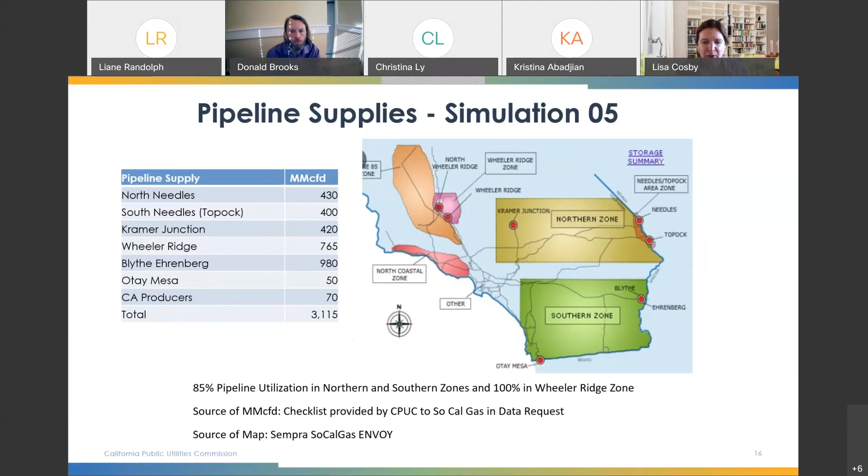And then we have the Wheeler Ridge zone in the north, the west, and then the California producers in the north coastal zone. We used 85% pipeline utilization in the northern and southern zones and 100% in the Wheeler Ridge zone.

And moving on to slide 17, this is another map of the zones and the receipt points, and this also shows the Los Angeles basin where the circle is, and this is just showing how the gas flows toward the Los Angeles basin where most of the customer demand is, and you'll see that most of the storage fields are near the Los Angeles basin or in it as well.

And so slide 18 shows the demand that we used in the base case for core customers, which are the residential and small commercial customers. We used the demand of 3,034 million cubic feet a day, and this was based on the SoCalGas forecast. You can see here the non-electric generation, non-core, of 664.6 MMCFD. This was also the SoCalGas forecast.

And then finally, the electric generation forecast. This is the natural gas for the power plants that use natural gas to produce electricity. So this was the forecast based on CPUC production cost modeling that was gone over in depth in the July 28th workshop as well.

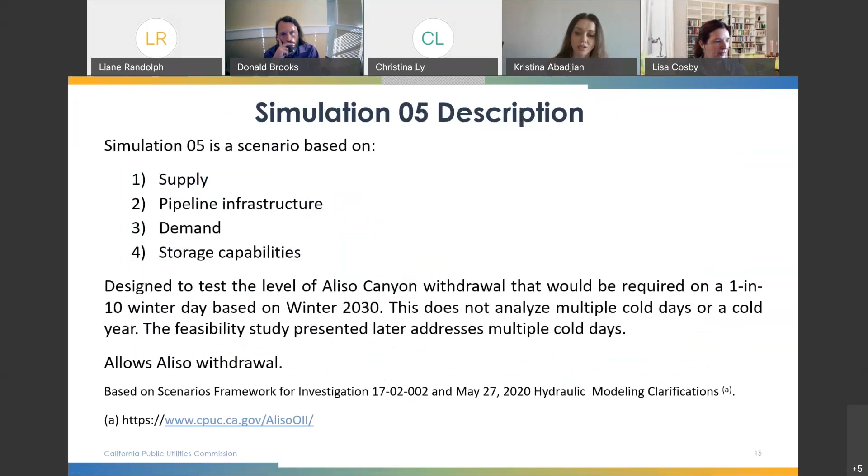Thank you, Lisa. We do have one question from Norman Peterson. Norman's asking about slide 14 and why it doesn't show the Simulation 5 that was presented on July 28th, which assumed Aliso withdrawal at 1265. So slide 14, the 1265 Aliso Canyon withdrawal rate would have been the maximum possible given the 90% Aliso Canyon inventory level as a starting point, but the results of the simulation showed a 520 withdrawal rate.

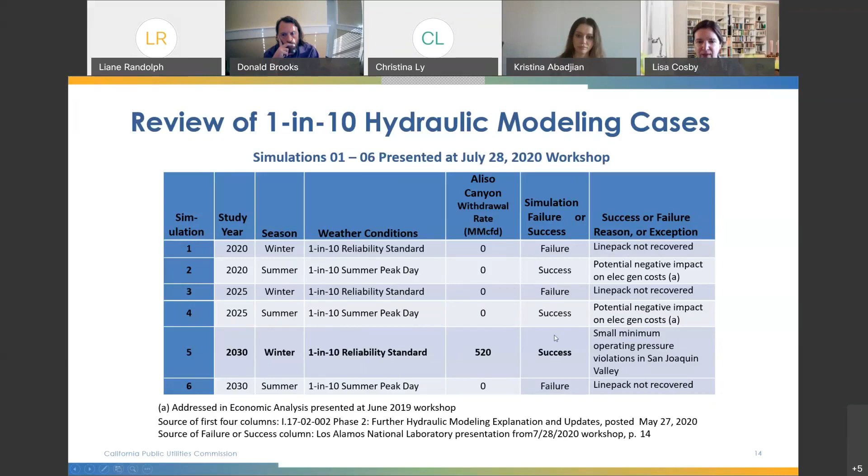So I think I have another slide where I have those lined up next to each other. Slide 19. This is showing the maximum withdrawal rates in the middle column, and then the far right column is the results of the simulation.

Thank you. We have another question from Edward Bedners, who's raised his hand. Mr. Bedners, you're unmuted. Hi, I actually put it in the chat. Looking at the average 67% on slide 22 for non-Aliso, just curious, what is the actual range that y'all had over those years? Do you know? I don't have that handy right now. You're wondering what the range was by year? Right, from 2017 to 2020. I just wondered if there was a wide range and that average was in the middle, or if it fluctuated slightly around that average.

Oh, yes, I don't have that readily available, but that is something that I think I could provide later. Okay. Just my thought is that using the lowest of the three might have been a more conservative approach, but if it's a tight range, that wouldn't matter. Thanks. Thank you.

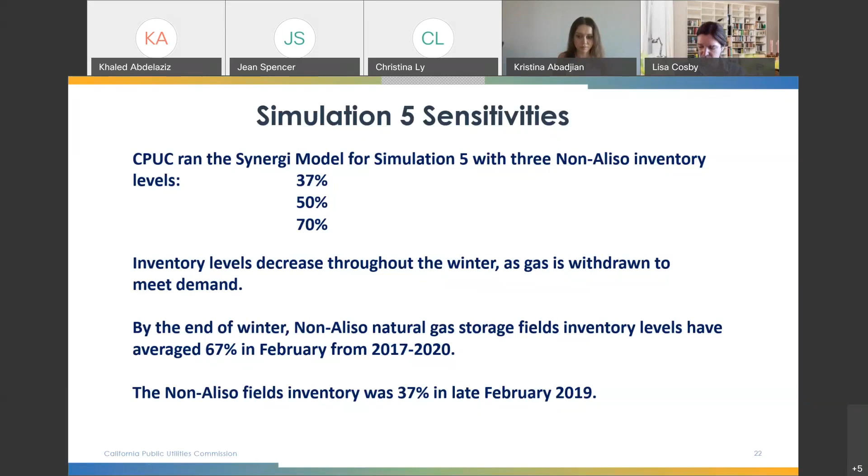I have a question about what you're showing in your slides today about simulation 5 in comparison to what LANL presented on July 28th. LANL slide 12 on 7/28 showed a maximum withdrawal rate of 1,265 MMCFD at Aliso Canyon. And then when the LANL presenter got to slide 14 for simulation 5, in the box for the line labeled pressures above minimum operating pressure, there was a no indicating SO5 failed. And again, that was with 1,265 MMCFD of withdrawal at Aliso Canyon.

And now today, you're saying that there wouldn't be a failure with the withdrawal down to 520 MMCFD. And we have on the side in a little box something about minimum pressure problems in the South San Joaquin Valley, which was quite a mystery at the July 28th workshop, and the way we left it was that would be looked into by SoCalGas. So could you help me walk from what LANL was presenting on July 28, which very clearly assumed 1,265 MMCFD withdrawal capacity at Aliso Canyon, to simulation 5 that shows success in bold for Aliso Canyon at 520 MMCFD withdrawal?

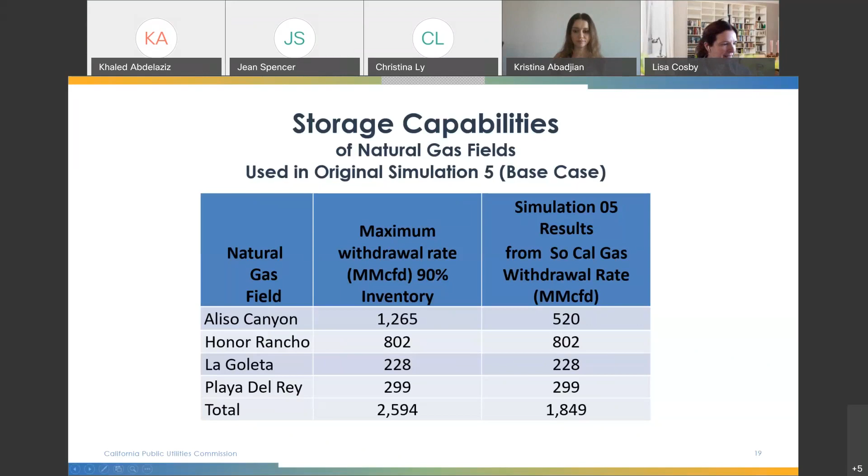So slide 24 is a preview of the results of the sensitivities, and I will be presenting detail in the following slides. But just to give you a sense of the results, sensitivity 1, using a non-Aliso inventory of 70%, the Aliso Canyon maximum withdrawal rate was 830 million cubic feet a day, and this was associated with an Aliso Canyon inventory of 13 BCF.

Sensitivity 2, with a non-Aliso inventory at 50%, this would be for Playa del Rey, La Goleta, and Honor Rancho, the Aliso Canyon withdrawal rate would be 1,010 MMCFD, and this would be associated with an inventory of 20 BCF.

And finally, for the third sensitivity with the lowest non-Aliso inventory of 37%, the Aliso Canyon withdrawal rate would be 1,160 MMCFD, and this would be associated with an Aliso Canyon inventory of 27 BCF. And just as a point of reference, the current authorized maximum inventory level at Aliso Canyon is 34 BCF.

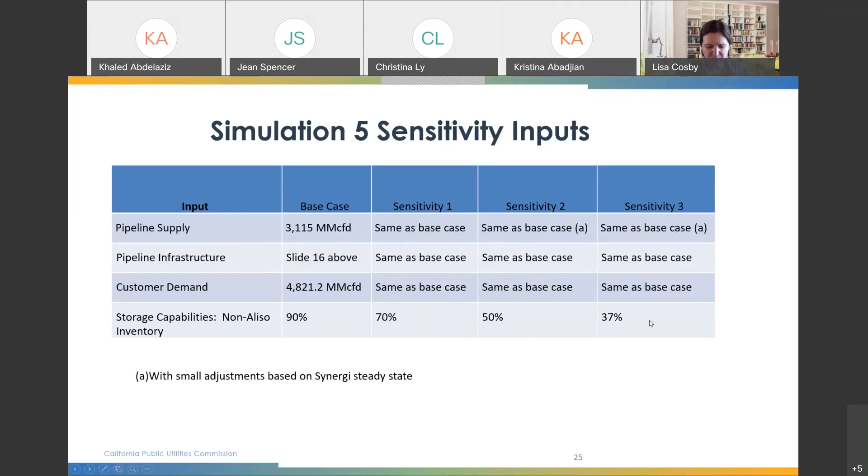Slide 26 lays out the criteria for a simulation success. So a success would mean that the combination of inputs would produce a workable result. And these were also outlined in our July 28th presentations, and they're also in the scenarios framework that's in the CPUC website in our source note below. So first, the criteria is the pressures remained above the minimum operating pressures. The second, the customer demand was met and regulators operated within rated capacities. Third, the pressures remained below the maximum operating pressures.

4, the line pack was recovered. And as you can see in note A, the line pack is the gas present in the pipelines throughout the pipeline system. There are over 100,000 miles of pipeline in the SoCalGas system. The line pack being restored means that the amount of gas present in the pipeline at the end of the simulation is approximately equal to the amount of gas at the beginning of the simulation, which guarantees that each operating day does not impose any constraints on future days. The simulation is a 24-hour period that represents a full gas day. And finally, the 5th criteria is that the storage fields maintain pressure.

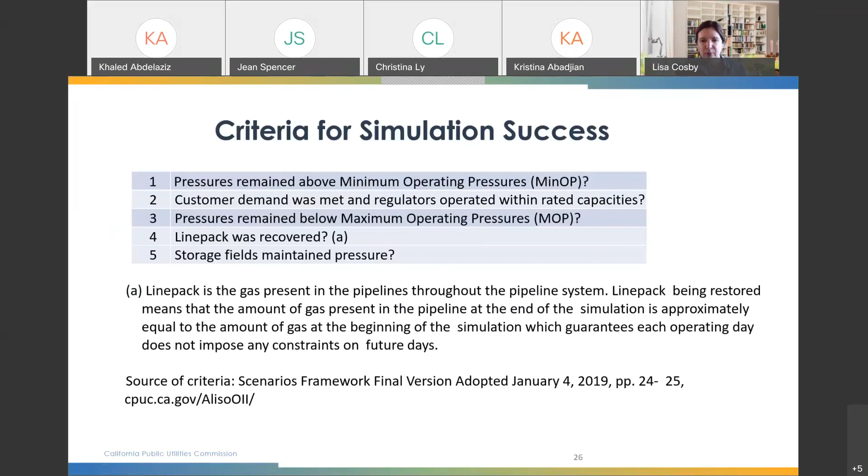So now we're on slide 27, and this is going to show us the results of the first sensitivity with the non-Aliso fields at 70% inventory. This slide shows the loads, the supplies, and the line pack. And the result was that 830 million cubic feet a day are needed from Aliso. I'm going to go over this graph in some detail because you'll see it again, and it's a little bit complicated. The x-axis shows 24 hours from 6 a.m. through 6 a.m. the next day, which is represented by hour 30. You'll see midnight is hour 24.

The y-axis has 3 axes. The innermost one is the loads or customer demands, and this is shown in the black dashed line. And these are in negative numbers. And you'll see that there's a peak in the morning at 7 a.m. And that's consistent with winter heating and cooking in the morning. The demand decreases during the day, and then in the early afternoon, it starts to increase again, and there's an evening peak at 1800 hours, or about 6 p.m. And about that time, the non-core load decreases.

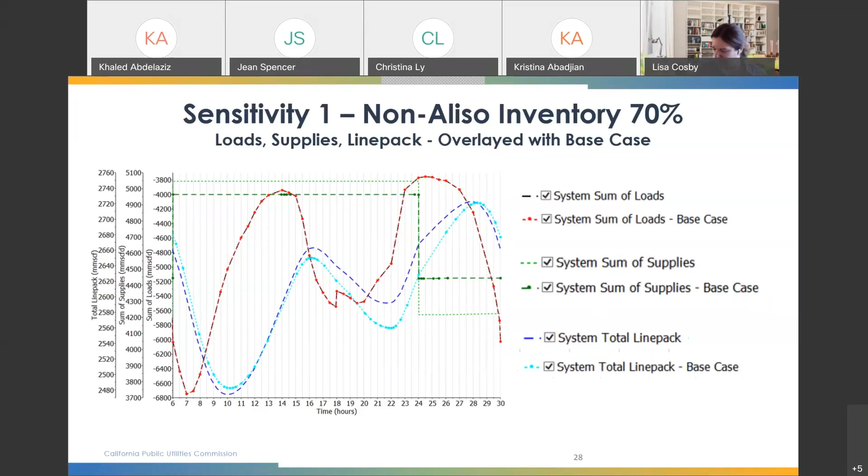Slide 30, this is showing us the summary of results of sensitivity 1. So criteria 1, did the pressures remain above the minimum operating? Yes, there were 9 exceptions in the San Joaquin Valley, all of which returned during the simulation, returned from their violations.

The demand was met. Item 2, the supply exceeded the demand. Item 3, did the pressures remain below their maximum operating pressures? Yes, there were 2 nodes that exceeded their maximum pressures by minor amounts, and 1 did not return from a minor violation. But this was not significant enough to stop the criteria from being met.

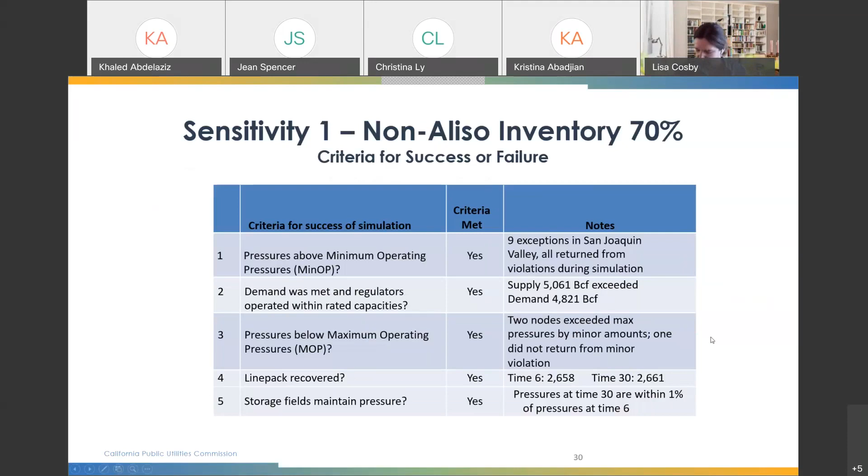So now we're moving on to slide 31, and I'm going to show similar slides as I just did for sensitivity 1. This is the result of sensitivity 2 with the non-Aliso inventory at 50%. So as we have less on hand in the Playa del Rey, La Goleta, and Honor Rancho fields, more is needed from Aliso, and the results showed that 1,010 MMCFD were needed from Aliso.

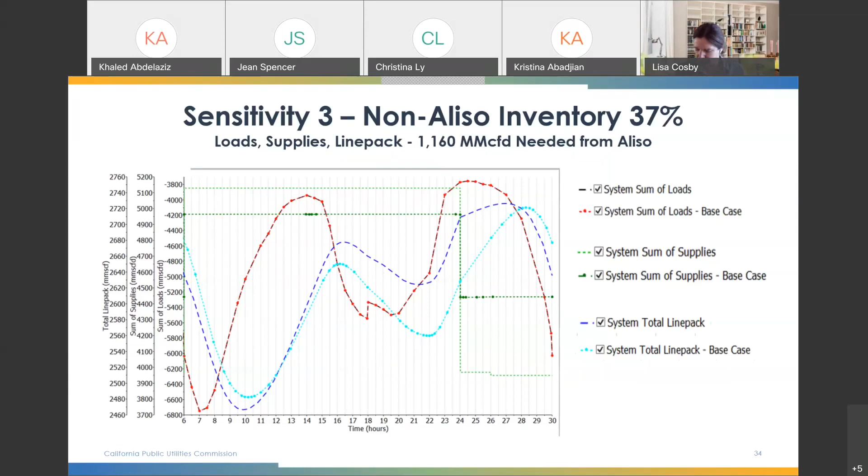Now we're on slide 35, showing the San Joaquin Valley pressures. Again, we have a similar result between hours 8 and 9 a.m., and the pressures do recover from their minimum operating pressure violations by the end of the simulation.

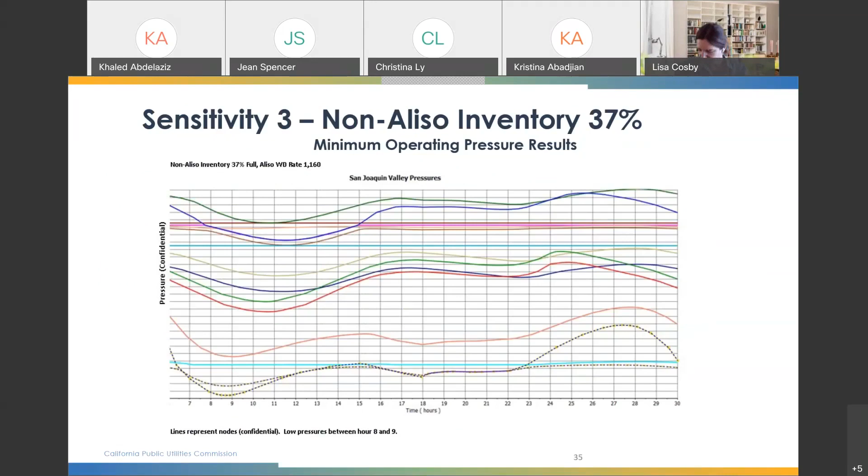Now we're on page 36, the summary of the results of the lowest non-Aliso inventory levels used in this simulation. So again, there were some minor violations of minimum operating pressures, but they did return from the violations. Item 2, the demand was met.

Item 3, there were 4 nodes that exceeded the maximum pressures by minor amounts, and 1 did not return from a minor violation, but this was not significant enough to keep this criteria from being met. Item 4, the line pack was recovered.

And item 5, the storage fields maintained their pressures. Now we're on slide 37, our conclusions. So the sensitivities on simulation 5 resulted in the following Aliso Canyon withdrawal rates and inventory levels.

Sensitivity 1 with the non-Aliso inventory of 70% showed an Aliso Canyon maximum withdrawal rate of 830 mmCFD and an Aliso Canyon inventory of 13 BCF.

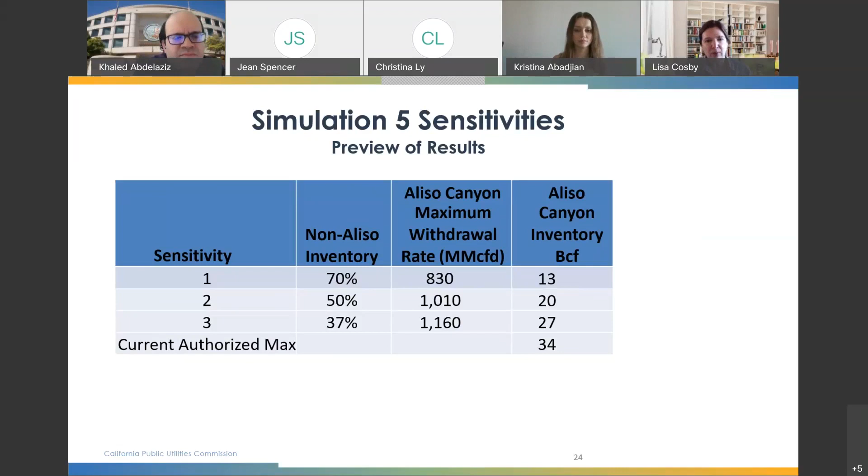This is also from the Synergi model. Let me go to a slide where... so when we run Synergi, one of the outputs is this chart, and it's a result of all the calculations that go on during the simulation.

As a result of the supplies and the demands, so that's not something we put in. It's an output of Synergi.

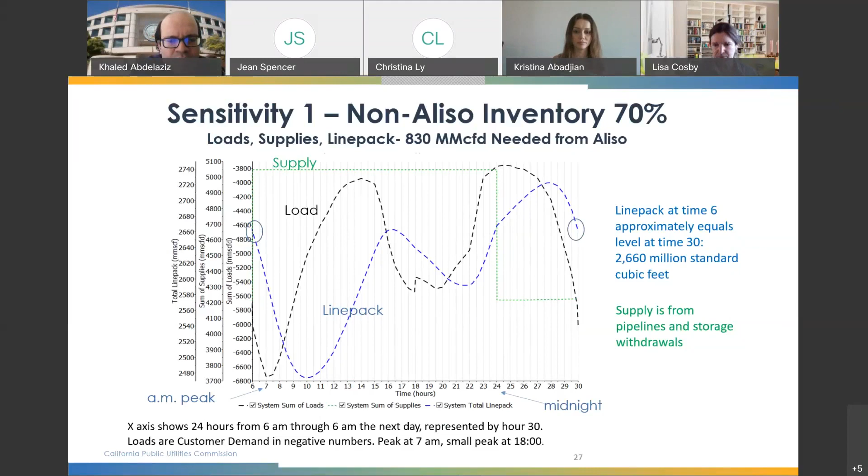It said actual recent inventories, and then the required inventory was 27, so I just want to be sure. So up at the table, sensitivity 3, that means that the actual recent inventories were 37%? The actual non-Aliso inventories were 37% as an average in February 2019. And so that's the average of... honor.

Sorry, go ahead. No, that's great. I shouldn't have interrupted, I'll let you finish.

Yes, the 37% was the average at Honor Rancho, Playa del Rey, and La Goleta in February 2019 on a couple of days that month.

Okay, just wanted to be sure I had that right. Thank you. This is Jean.

I just wanted to add to that a little bit. One of the reasons we wanted to include those numbers is what we saw in that year was that Honor Rancho was depleted a lot more than the other storage wells. So we actually put in the real numbers from the different fields so that we could model how the distribution actually was in that year.

No, that was terrific. I'm really appreciative of that. I just wanted to make sure I understood that association. Thanks.

Thank you. Norman Peterson has a follow-up question to his original question, and it's how consistently is the line pack at 2660 mmCF?

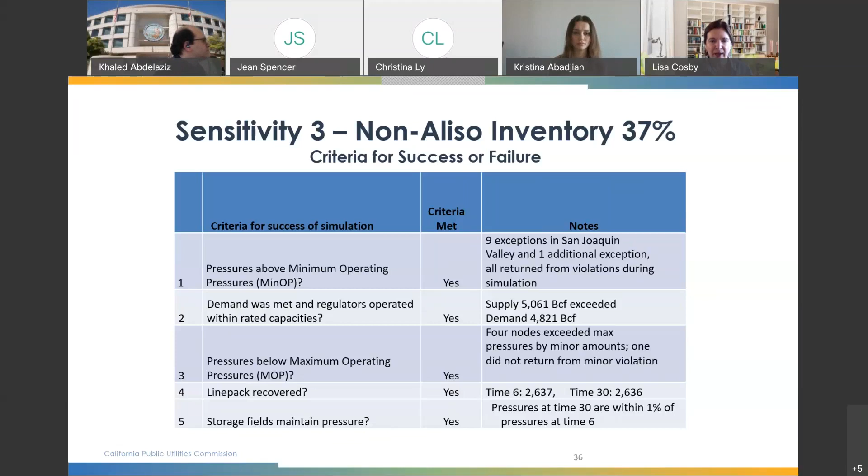I can go back up to the 50%. The 50% level line pack was 2647.

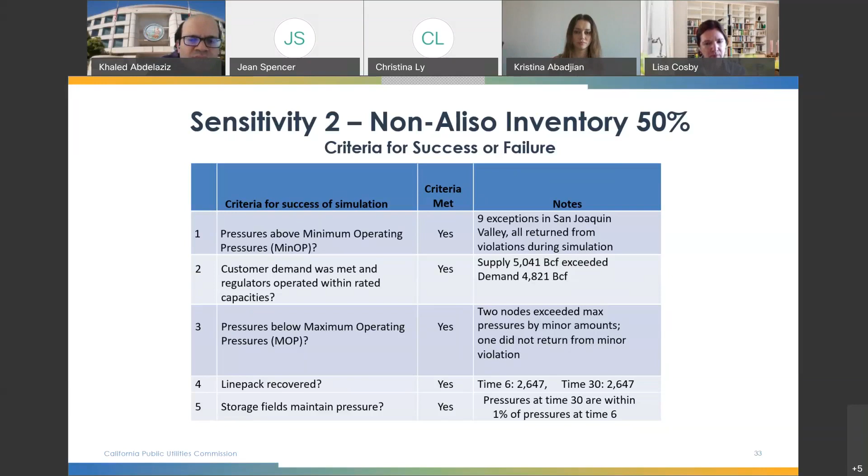Thank you. The next question is from Kathy Yap. Miss Yap, you're unmuted. Yes, I had a question about, I think it's slide 37, where you have the results for the sensitivities listed, the conclusions.

The Aliso Canyon inventory levels you list, do you know whether those are the minimum inventories that are required to produce that withdrawal rate? That's, for example, sensitivity 3, the 1160 number for the withdrawal rate. You need, is that a minimum or an average for the associated inventory?

I think you could consider that a minimum in that you would need to have at least that much in there to have the withdrawal rate of 1160. So you couldn't go below that 27 and still get a withdrawal rate of 1160.

Okay, thank you for clarifying.

Thank you. The next question is from Jason Egan, who asks, is Energy Division suggesting that there would need to be a requirement that SoCalGas maintain certain minimum Aliso inventories throughout the winter? Does this assume certain Aliso withdrawals in November through January, and that SoCalGas would need to have 27 BCF in Aliso for February?

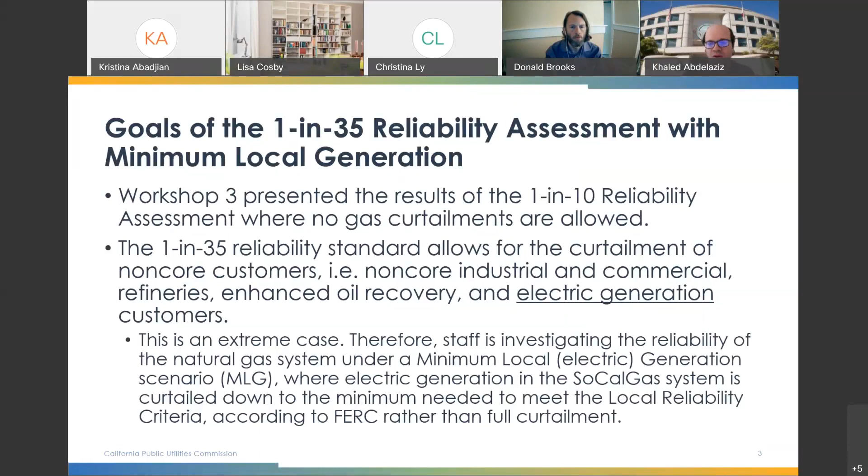So now I'm on slide 4. I'm going to discuss the summary of inputs and assumptions for the 1 in 35 with minimum local generation. So here I'm showing a breakdown of the demand that would be included in the model, or in the SynerGi model.

The first thing I'm going to note here is that the summer demand under a minimum local generation scenario is lower than that of the summer high demand we discussed in workshop 3. And we already showed in workshop 3 that for those summer cases, we didn't need Aliso. So we saw no reason to run the summer cases under minimum local generation scenarios.

However, for the winter, we know that the simulations in the 1 in 10 fail without Aliso. Now we have a much lesser demand for 1 in 35, so we're wondering how that would affect the need for Aliso or not. So we're looking now at 3 simulations, simulation 7, 8, and 9. They're all for the winter season, and for all 3 study years we have considered. Simulation 7, that's winter 2020. Simulation 8, that's winter 2025. Simulation 9, that's winter 2030.

And the second column here on slide 5 is what I term the minimum local generation. Again, this is Energy Division's output from production cost modeling, which in itself was based on power flow studies that were provided by balancing authorities, namely CAISO and LADWP. So those power flow studies served as an input in the PCM, and we only designated certain plants to be allowed to consume gas while curtailing all the other plants for one of the summer months, which I believe was September, and then one of the winter months, which was December. And the end result of this PCM simulation is what you're seeing here.

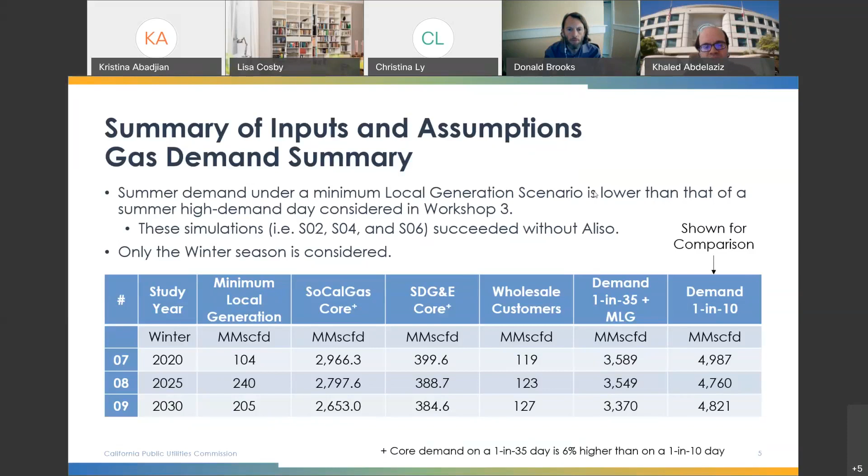showing the total fuel burned by all plants that were allowed to run under a minimum local generation scenario. So this is basically a sum of all power plants or all units coming from the production cost modeling under a minimum local generation scenario. On the x-axis, you're looking at the hour of the day, starting from hour ending 1 to hour ending 24. On the y-axis, this is the electric load, or how much gas demand we need actually, in million cubic feet per hour. And then inside the plot, you have three cases: in red, that's 2020, in green, that's 2025, and in blue, that's 2030.

And I've added the numbers here on the chart. That's the total use of the whole day. 240, that's the green, 2025. 205 MMCFD, that's the blue of 2030. And 104, that's winter of 2020.

So the only thing I would note here is that in 2020, you see the morning peak and you see the evening peak in the electric generation, or in the gas required by the electric generators. You don't see much of the curve here. If you go to 2025, which is the green curve, we have slightly more gas use for the minimum local generation to maintain reliability. And we also start to see the duck curve in winter. And then you move to blue, which is the winter 2030. You have slightly less gas use to maintain local reliability, but then the duck curve becomes more and more prominent.

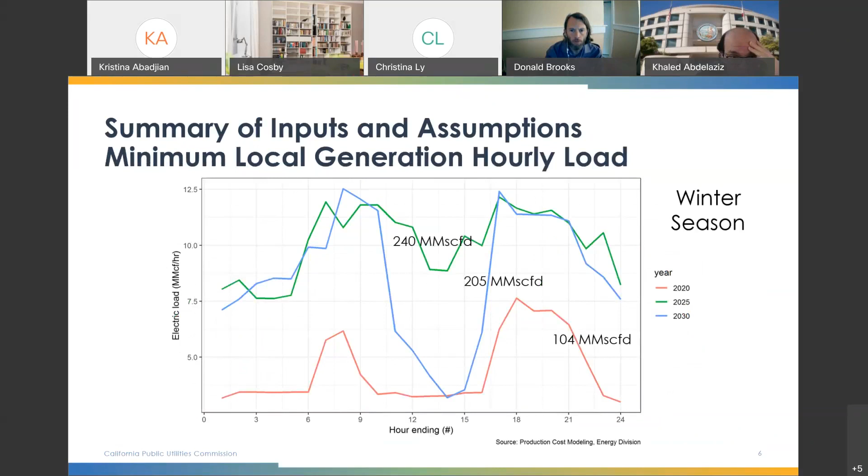So what I would note here is that although we see those duck curves for the minimum local generation, and we were afraid that those ramps are too much to be handled by the gas system, once you lump them or superimpose them to the core customers, you end up with this plot here. So you don't see much of the ramps of the EG, but the profile is heavily governed by the core customers' profiles, which is very, very similar to the 1 in 10 cases that we have shown this morning and in the last workshop.

So I'm using the same color codes here. In red, that's winter 2020. In green, that's winter 2025. And in blue, that's winter 2030. And again, this is showing the loads after we load everything inside SynerGi. And this is how the loads look.

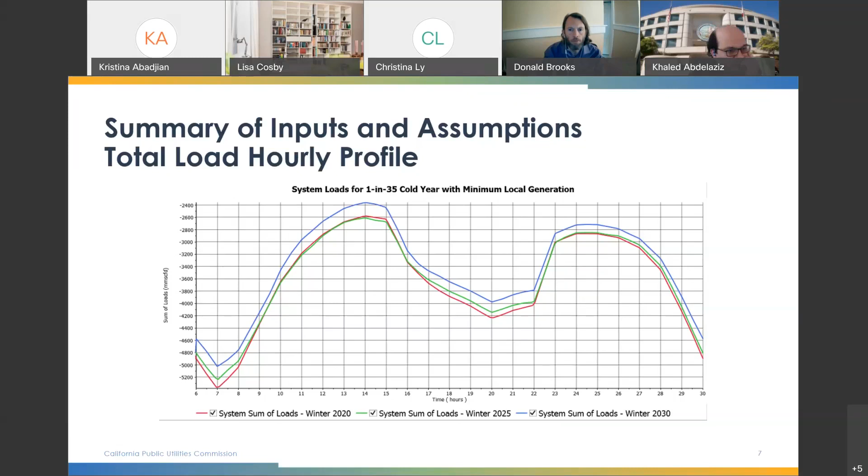So now that I've covered the loads, I'm going to start looking at the rest of the assumptions using the model. So I'm now on slide 8. That's the summary of inputs and assumptions for the supplies, storage fields, and the outages. And we're basically using the same set of assumptions used in the 1 in 10 in workshop 3 or in the base case in this morning's workshop. So we're assuming that the non-Aliso fields are maintained at 90% inventory levels. We are using the maximum withdrawal curves. We are still using reduced pressures on line 3000, line 4000, and line 235-2, which are on the northern system.

I've listed the supplies here, the southern zone, the northern zone, the Wheeler Ridge. The second column, we have the nominal capacity. We previously said that we're going to use receipt point utilization of 85% for the north and the south and 100% for Wheeler. So the column before last has the supplies without the outages. And then due to the outages I'm showing here, which are the reduced pressure on line 3000, line 4000, line 235-2, and adding a California production of 70, I end up with supplies of about 3.1 BCF. So these are basically the same supplies we've used in the 1 in 10 simulation.

We are also using 90% inventory levels in the non-Aliso fields. So we have the same withdrawal rates that we have seen before, which is 800 for Honor Rancho. I believe it's 299 for PDR and 230 for La Goleta. So I'm not going to go much into the details. I'm going to start showing the results now. So slide 9, that's the section break. Slide 10, I'm showing the results of those 3 simulations.

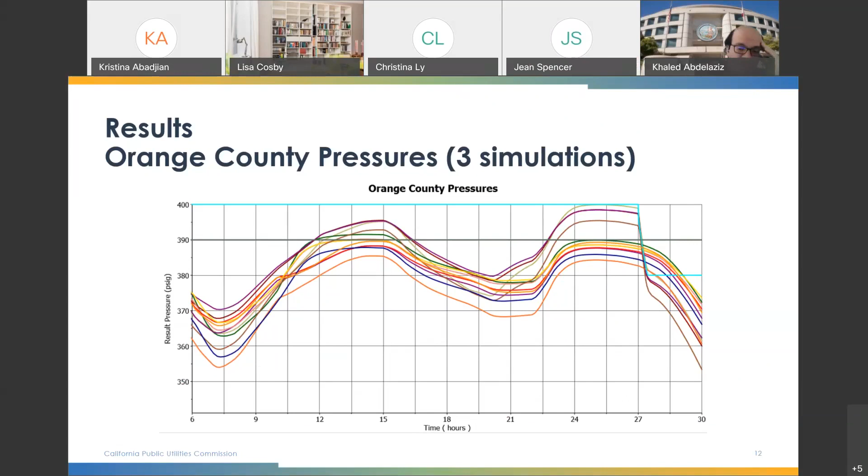Khaled, are you talking? I'm not hearing anything. Hi, testing. Hello, testing. I hear you, Christina, but I'm not hearing Khaled. Okay. Khaled, if you can hear us, we cannot hear you. Can you guys hear me now? Yes, we can hear you. Okay, great. Yeah, my phone got disconnected. I had to hang up and call back. So start video. Let's start sharing again. All right.

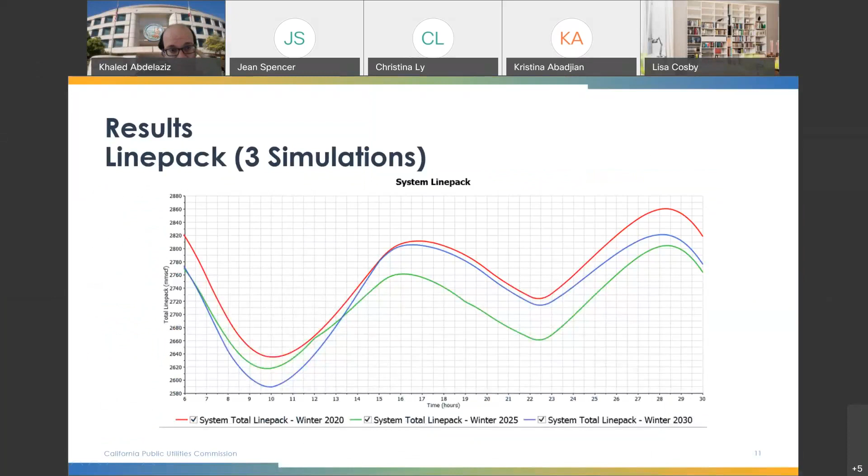So as I was trying to mention, all the simulations were successful, line pack was restored, all 4 criteria were maintained. So here is the summary of findings. The daily demand on the 1 in 35 extreme peak day with a minimum local generation is about 70 to 75% of the daily demand on a 1 in 10 peak day. The 1 in 35 extreme peak with MLG, or minimum local generation, simulations for winter 2020, 2025, and 2030 were successful without the use of Aliso Canyon UGS.

It follows also that the 1 in 35 extreme peak with all non-core curtailment simulations will also be successful without the use of Aliso. And sensitivity on the inventory level of non-Aliso fields could be performed if needed. And that's all I have for the 1 in 35. And now I think we can take questions.

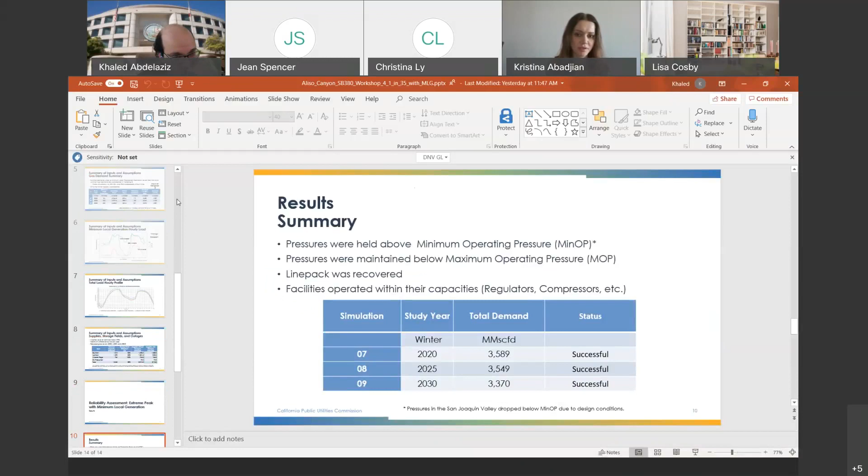Thank you. We just have one clarifying question from Norman Peterson, who asks if the min local gen figures came from the joint agencies, specifically the CPUC, CEC, LADWP, and CAISO. If not, what was the source? Yes, the power flow studies were supplied by LADWP and CAISO. We took those as an input for our own production cost modeling in SERV-M, and then the result of that was the fuel burn profiles for different units. And from them, we were able to generate the hourly profiles for the gas use and the total demand that I'm showing here. To clarify, it's LADWP and CAISO, but not the joint agencies, because the joint agencies would include the California Energy Commission.

Thank you. Our next question is from Marcel Hawicker. Question is, how did non-core curtailments compare to historical curtailments? And what was the amount of non-core gas that was curtailed? I honestly don't have any idea about the magnitude of the curtailments historically. Maybe the gas policy and reliability team has any input. So just for comparison, the EG generation for the 1 in 10 is almost a BCF. What we model in the 1 in 10 for EG is around 1 BCF in the winter. So here you're actually looking at 10%, 25% and 20% compared to the 1 in 10 simulation that we showed this morning.

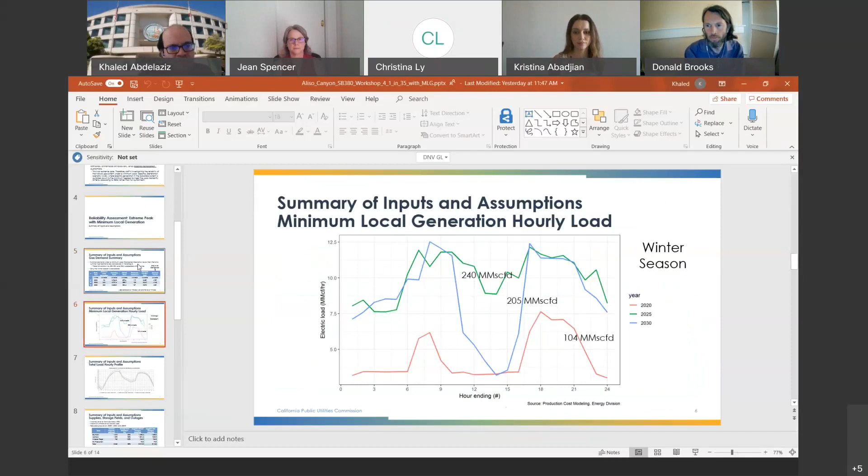Thank you. We have another question from Jason Egan, who asks, to make sure I'm tracking, you used 1250 MMCFD of receipt capacity on the northern system, which is 100% of the current receipt capacity there. Is that correct? Let me bring up the slide, Christina. So the supplies with the outages are the 1250. So these are under certain reduction of pressures on line 4000, line 235, and line 3000. And just a reminder that this is for the year 2030, not for the current year. Jason's follow-up question is, and for all of these scenarios, we are assuming all non-core customers are curtailed except minimum generation. Yes.

Jason asked another follow-up. In our last workshop, MinGen showed pretty significant increased costs and unserved load. Was that a consideration here? I'm showing the results for the hydraulic modeling only. So we're trying to know the effect of only maintaining minimum local generation on the storage fields, on the gas system. I believe Donald and Munir addressed the reliability issues back in workshop 3. Donald, do you want to add anything? No, you said it right. We addressed the electric reliability effects before. It's the hydraulic modeling reliability effects that we're talking about now.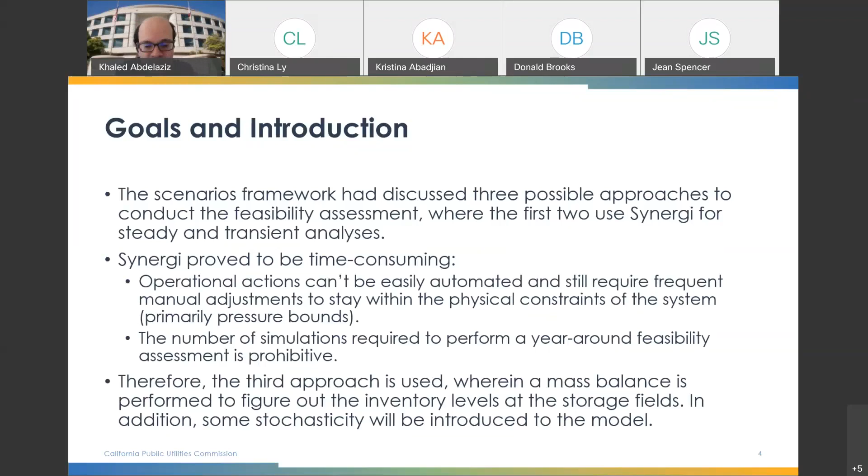So I'm moving to the next slide, slide 5. I'm finding 2 ways to present the methodology. On this slide, I'm just presenting the summary of how I executed the feasibility assessment. In 4 or 5 slides after that, I'm presenting it in depth. You might not be interested in the exact parts, but I'm hoping that this summary will provide the outlines or main steps to perform the study that we used.

So the summary on slide 5: the first bullet, the methodology attempts a mass balance on each day of the study year. The methodology inputs are the forecasted daily demand using random draws from a known distribution, and an assumed pipeline capacity, for which I'm going to assume that the customers are scheduling this full capacity every day.

Also, one very important input to the methodology is the maximum withdrawal injection curves that are obtained from SoCal and are primarily experimental results from their fields. Another input is the working gas capacity of all 4 storage fields.

So using those inputs, I do a simulation for a whole year, and for each day I determine whether there is an excess or deficit in the gas supply. Based on that, I either inject or withdraw from the storage fields, and I do that while respecting the injection and withdrawal limits of each of the 4 fields.

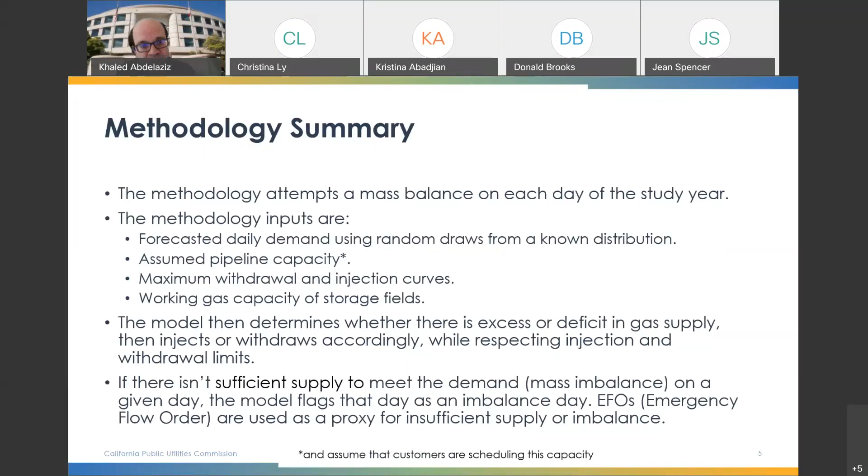So this is the summary of what is in depth for the methodology. The following steps: step 1, I started looking at the historical data for the send-out. We already had a data request from SoCal, I believe it was data request 6, and we have historical send-out data between 2010 and 2017.

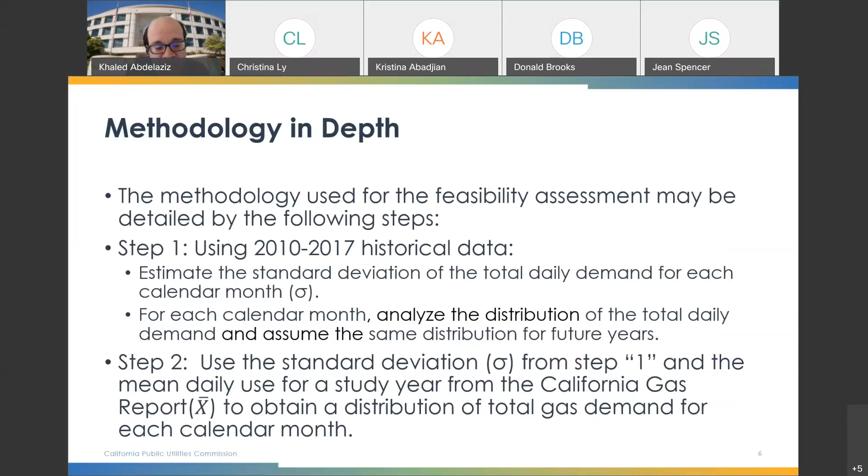So now I'm moving to slide 7. Step 3: for each calendar month, randomly select a number of daily demand values from the assumed distribution. Ideally, from a statistical point of view, I need to make many draws, but since I want to track the inventory levels, I have to make a number of draws equal to the number of days in that calendar month, be it 30 days, 31 days, or 29 days.

And once I do this draw, or I select a number, now I have what I term the forecast daily demand on that day.

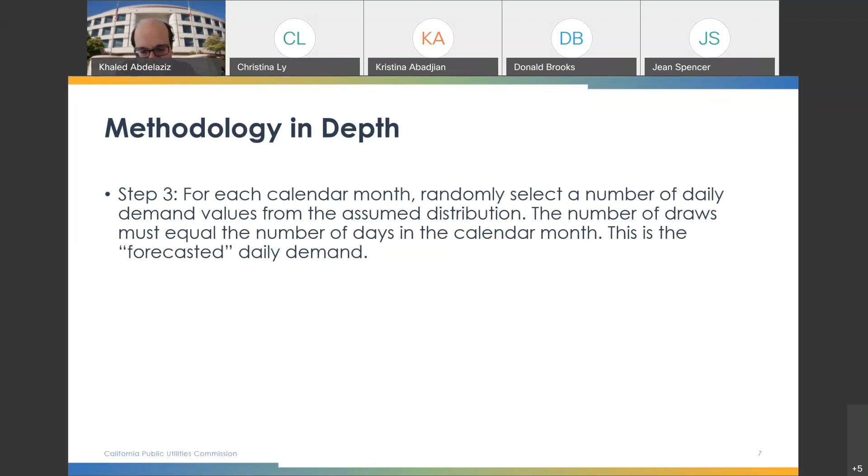Step 4: I have to make further assumptions on the remaining inputs. So I assume the receipt capacity and California production, and I make a certification here that I'm going to schedule full capacity every day.

Step 5 is the daily excess or deficit in the natural gas supply. And if there's an excess, I store in the storage field without exceeding the injection limits.

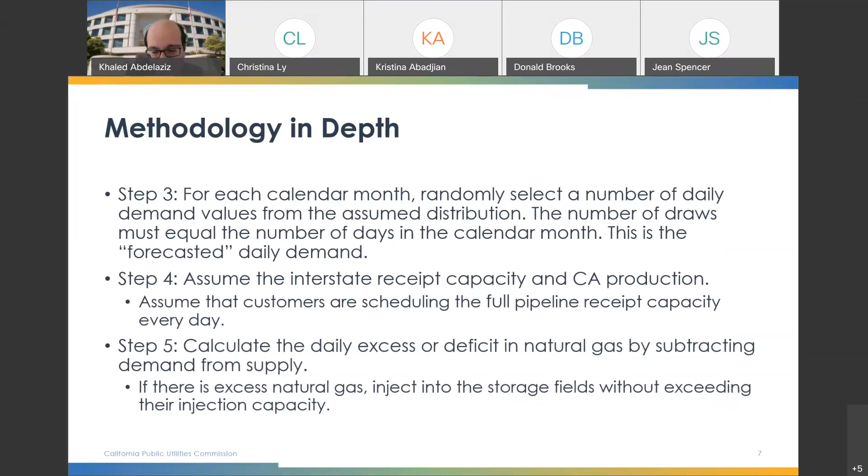Slide 8 covers the deficit case, where I have to withdraw from the storage field. And then in step 5, I'm trying to withdraw, and if there isn't sufficient capacity to meet the demand, I flag the day as an EFO and save it for further analysis.

And again, triggering an EFO or imbalance signals that I wasn't able to maintain the low inventory levels - the inventory levels over a whole calendar year - using known maximum withdrawal injection curves.

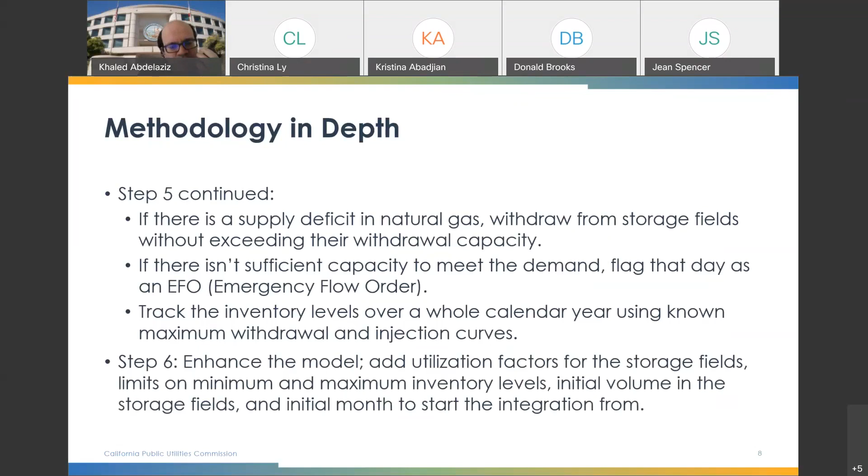Step 6, I introduce some enhancements to the model: utilization factors on the storage fields to account for well availability. I'm starting to put minimums so I can vary those on the inventory levels, the initial volume in the storage field, and which month I should start the integration or the tracking from.

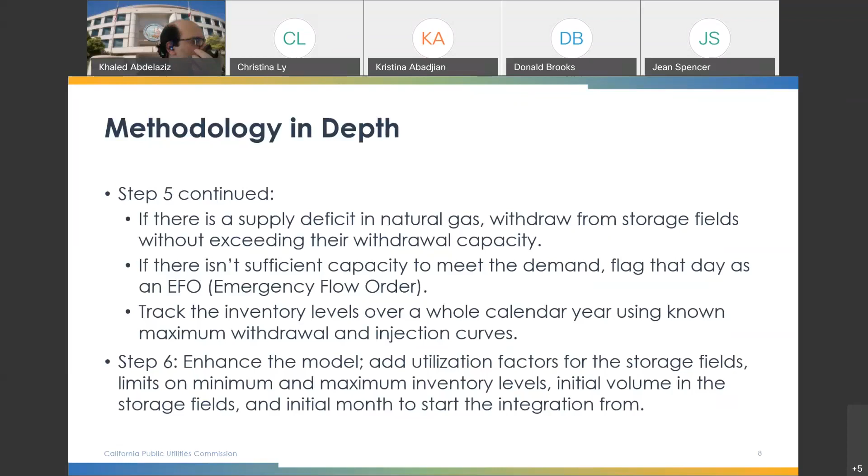All right, so again, summary of the methodology. Calculate the standard deviation from historical data and obtain the daily mean from CGR. Use those two parameters to come up with the distribution for each calendar month. Determine the gas supply assumptions. Calculate whether I have excess or deficit in the gas, then start withdrawing or injecting, and finally track the inventory levels over the whole year.

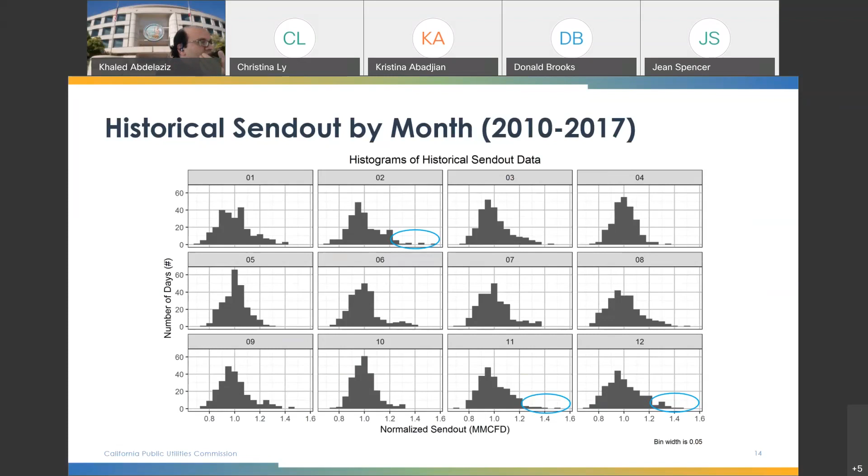So as much as I wanted to use a Gaussian or bell-shaped distribution, that was not possible, and I opted for what is called the gamma distribution. Gamma distribution is widely used in engineering to model continuous variables that are always positive. Gas demand is always positive, and it has a skewed distribution like I showed, everything skewed to the right. Gamma distribution also represents an accumulation of events, in this case customers burning that gas.

So next, slide 16. This is me trying to fit the historical data into a gamma distribution. What you need to know here is that the blue curve tracks the red curve exceptionally well most of the time. The blue curve is the gamma distribution, the red curve is the historical data, and the red curve is an approximation of the histogram you see in the back. At this point I was satisfied with the gamma distribution, and I went ahead and decided to use it for the rest of the analysis.

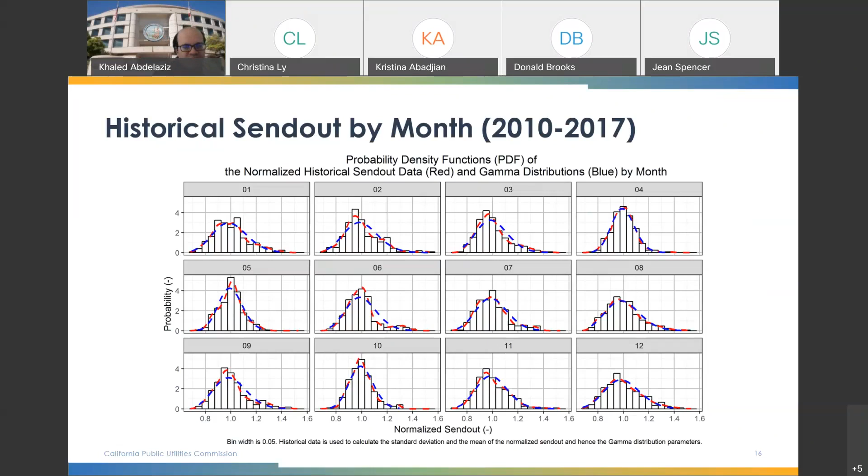But I still need to know the standard deviation, and I can get the mean from the California gas report. If you look at the California gas report, whether for a recorded year or a forecast year, the pipeline operator tends to show the mean daily demand for each calendar month—one number for January, one for February, and so on, whether for a cold year or an average year. But I still would like to know the standard deviation.

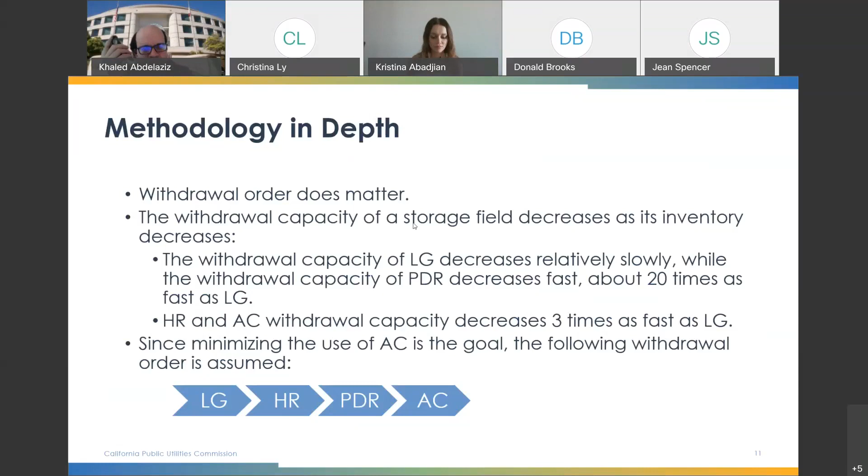Now, the two cases that follow this, I don't want to get too far ahead. So if you could just clarify how you use these in the cases that follow, that would be appreciated. Yeah, on each slide, you're going to see my assumption on the left, whether I use the cold year, an upper standard deviation, or lower, or an average year. Okay, that's what I needed. Thank you.

We have another question from Gil Topate. Slides 10 and 11 complement each other, but did your analysis look at scenarios on the number of days and withdrawal amounts it would take before accessing Aliso Canyon would be required? In other words, if Aliso Canyon is last for withdrawals, is getting to these withdrawals dependent on conditions of a single cold day or multiple days?

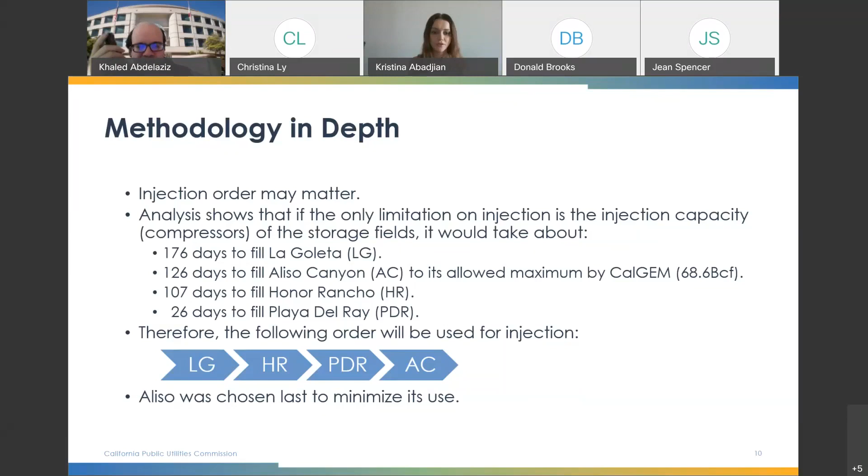Yes, he says thank you, and I don't see any further questions. All right, let's move on.

All right, so I'm going to present a sample of the results first. I just wanted to make sure how the model is working. So I'm going to show you two very extreme cases, one I call the ideal case and one is the unfavorable case, just to give you a sense of what plots I was looking at and how I'm judging one case from the other. So I'm going to start with a very nice case here. This is what you're looking at. Forget about the graph on the right for now. Just look at the assumptions on the left.

So this is a scenario where I'm assuming an average year. I'm assuming a daily capacity of around 3 BCF. And this capacity is only 100 less than what we assumed in the reliability assessment. I'm working on the less conservative case. That's a lower standard deviation. So it's nice and there's not a lot of variation throughout the year, throughout the month for a given demand. I'm also assuming all wells are available, which is actually impractical.

I'm using assumptions here. What I started with is I'm not allowing the non-Aliso fields to drop below 90%. So the fifth bullet on the left, I'm allowing the non-Aliso fields only to drop to 90%. And the last one, I'm allowing all the fields to be filled up to 100%. And then let's go over the plot on the right. You're going to see at least, I'm counting 11 cases. I'm showing this plot, so I'm going to try to explain this plot.

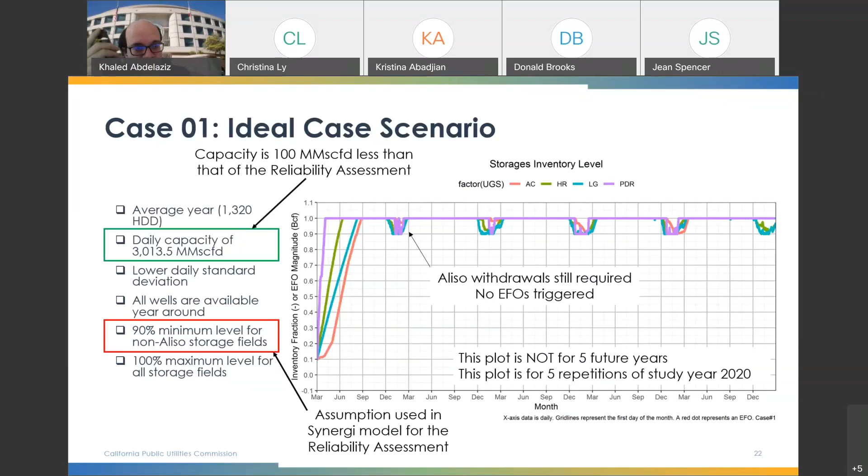All right, so I hope this graph makes sense now. I'm going to move to a second case, which is what I call an unfavorable scenario. I just wanted to show how bad it's going to be if I change the assumption. So now we're looking at this. This is one of many bad case scenarios or unfavorable scenarios.

So this time, instead of having an average year, you're looking into a cold year. I brought down the capacity to 2.6 BCF. I'm using the more conservative standard deviation, which is the upper. Wells availability are down to 75%, which we can see happening depending on well work and outages. I'm allowing the non-Aliso fields only to drop to 90, and I'm allowing 100% for all levels.

So the axes are the same, except now you're starting to see those red dots, and each red dot represents a day where I wasn't able to meet the demand. I'm showing only the low EFOs, so these are days when I wasn't able to meet the demand. And I actually combined in the same axes on the left. So if you look on the left, this is the amount of imbalance that was present on that day. So if you look at the very high end of the chart, I had imbalances of almost a BCF, and you have it all over the way.

And the reason I'm saying this is a very bad case scenario, even though I allowed Aliso to be filled to 100%, at this very low capacity, which is lower than the average daily mean that you need for a cold year, I wasn't able to fill Aliso all the way. So you can see even in any of those iterations for year 2020, the maximum I can reach is about 35% in the second iteration.

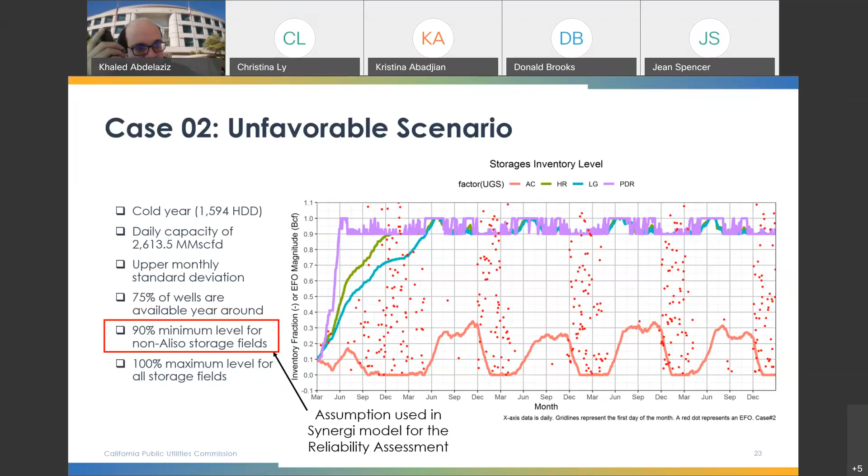So like I said, this is a very unfavorable scenario. We're decapping basically the pipeline. So starting to use some more reasonable numbers, I'm going to show a few more results. So on slide 24, I'm summarizing what I have shown and what I'm about to show. In previous slides, I showed case 1 and 2. Case 1 was the ideal case, no EFOs, everything is nice and warm. Case 2 is a cold year with a very bad shape on the pipeline. So I did many iterations. I'm only showing what can deliver the message here.

So for the next slides, for case 21 to 24, I'm doing a sensitivity on the Aliso maximum allowed inventory level for a cold year. So I'm keeping the non-Aliso minimum allowed to a constant and then playing around with the maximum allowed Aliso. In cases 9 to 13, I'm switching the things around. I'm doing a sensitivity on the non-Aliso minimum inventory, and I'm keeping Aliso constant. I think I'm going to make a stop after case 9 to 13 before going into the Hadley case, the parametric study.

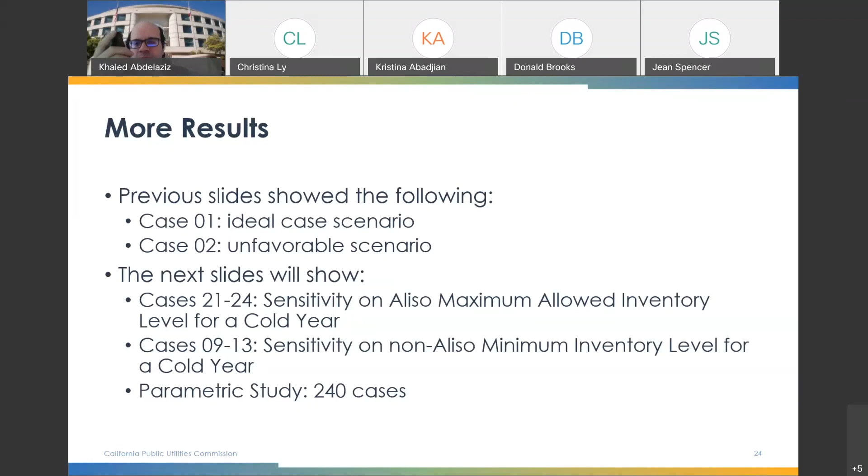All right, so case 21 to 24. I'm now on slide 25. So I'm using a cold year. I'm using a daily capacity, something more reasonable. It's not a 2.6 and it's not a 3, it's a 2.8. An upper monthly standard deviation, so the more conservative, 85% of the wells available. I'm still trying to maintain a 90% minimum level for non-Aliso and 100% maximum level for non-Aliso fields.

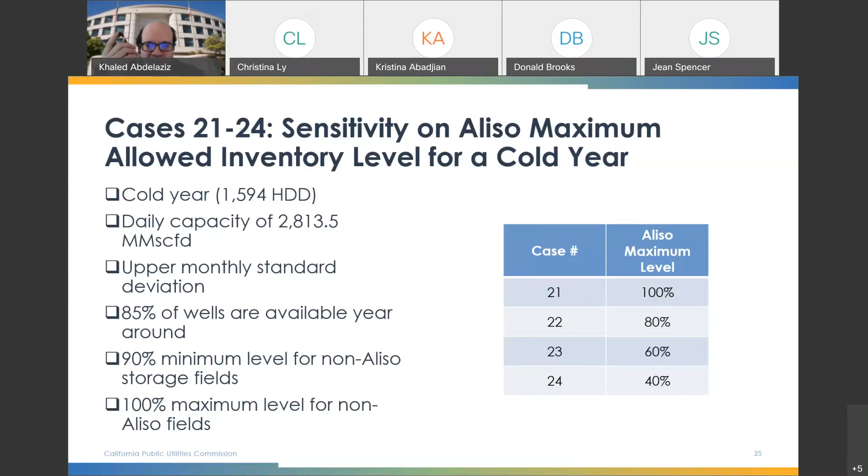So the next 3 slides, I'm trying to increase the allowable inventory in Aliso. So this is 40%, this is 60, 80, and 100. So I try to scroll those many times to see what's happening. So I can see that the more I fill Aliso, maybe I'm getting less EFOs, but I'm nowhere close to getting rid of the EFOs.

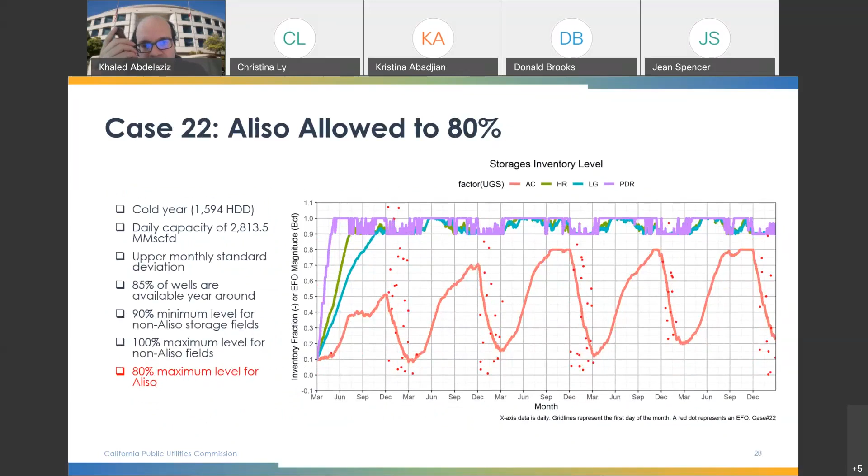Maintaining the non-Aliso fields at a 90% inventory level, as assumed in the reliability assessment in Synergi, is not feasible, and it's starting actually to look contradictory with minimizing the use of Aliso. Again, here, however, I allow Aliso to be filled even to 100%, just not letting those fields drop below that and making use of them is not helping. And though I'm not showing the results, I'm saying similar results were observed if I let those fields drop to 70% or even 50% inventory levels, which I'm about to show next.

So the next batch, so the previous batch, I was doing a sensitivity on the allowed maximum inventory in Aliso field. This batch, I'm fixing Aliso. So if you look at the very last bullet on slide 31, I'm allowing Aliso only to be filled to 60%. And I'm still looking at cold year, have a much more optimistic daily capacity of 3 BCF. I'm still looking at the more conservative case, upper standard deviation, 80% wells are available, and for the non-Aliso fields, maximum inventory allowed. And then I'm going to show 5 levels, and those 5 levels were actually inspired or taken from the reliability assessment.

So case 9, 90%, and that was the base case in Synergi. 70%, that was sensitivity 1 that Lisa Cosby showed us this morning. 50% was sensitivity 2. Again, we've seen that this morning. And instead of doing the 37, I just went with equidistant intervals. So I did also a 30%, and then I did a 10%. So again, the 5 cases you're about to look at, everything is the same, except that I'm allowing the non-Aliso fields to drop to those levels that I'm showing here. So case 9, 90, case 10, 70, and so on.

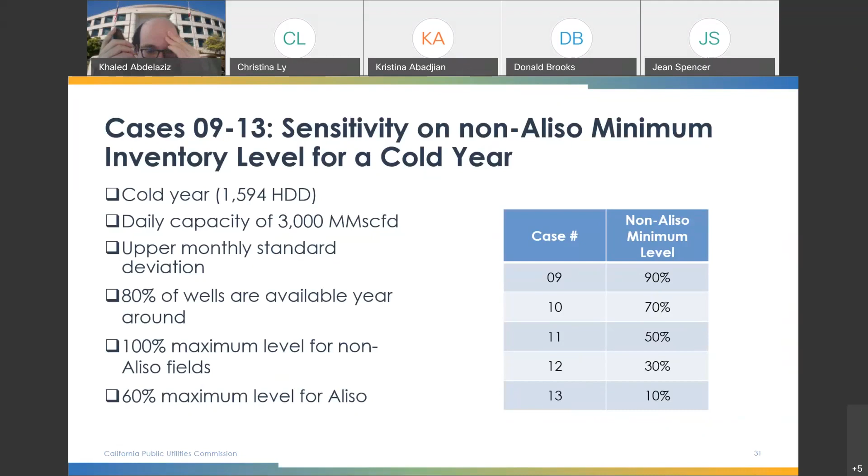So this case here, I'm allowing Aliso to be filled to 60%, and I'm actually able to reach that target. The non-Aliso fields are allowed to fill to 100, and only drop to 90%. And I'm still seeing those EFOs. So the next trial, now you can see instead of dropping only to 90%, the non-Aliso fields, now I'm allowing them to drop to 70%. You can see immediately I'm using less of Aliso, even though I'm required to maintain the 60%.

If you look here at the span of how much I used in this case on slide 32, I went from 0.6 down to 0.2, which means I used 40% of the gas in Aliso. If I go into this case here, just allowing the non-Aliso fields to drop to 70, I'm starting to see less use of Aliso. So I'm dropping from 0.6 now to 0.3, so 30% of Aliso instead of 40%. But again, I'm required to maintain this inventory to get the higher withdrawal capacities.

Now I go to the 50 minimum levels in the other 3 fields. I can see already I'm at my minimum targets for PDR. This one I allow them to go to 30%, and then this one I allow them to go to 10%. So in each of those iterations, which I try to locate on top of each other like this, you can see there is less use of Aliso if I allow those fields to drop.

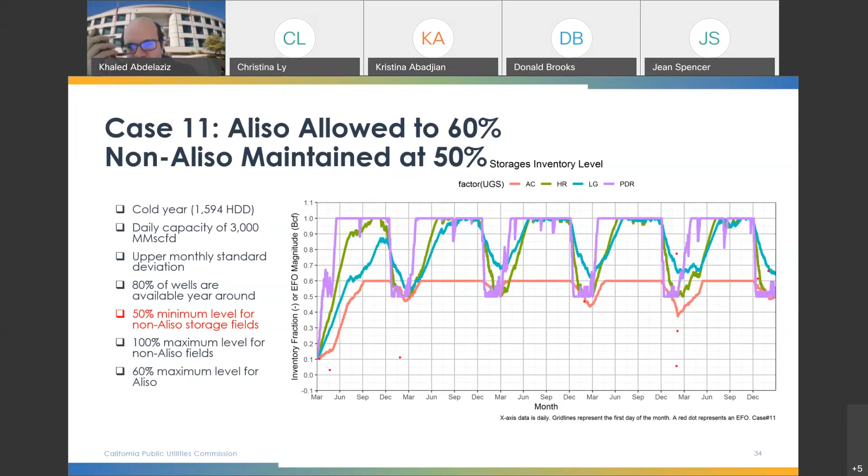So at this point here, I actually realized I won't be able to look at that many results. I have many cases, I have many independent parameters. I'm looking at those EFOs, and I visually can't confirm what is the best case scenario or what we can do. So here I'm saying 3 EFOs, 5 EFOs, 1 repetition, I'm not seeing EFOs. And I know I'm only doing 5 repetitions of year 2020, and that's not statistically enough. So at this point, I go on what I call a parametric study, or you can call it a sensitivity study. So instead of looking at visuals and tracking the inventories, I'm going to run that model multiple times, and I'm going to vary 4 independent parameters. I'm going to vary the pipeline capacity within a certain range I'm about to show on the next slide. We're on slide 39, by the way.

I'm going to vary the well availability. I'm going to vary the non-Aliso minimum inventory. I'm going to vary the Aliso maximum allowed inventory. And instead of looking at plots, I'm going to look at those dependent parameters that I know now are useful. I'm going to look at the average number of EFO days, so how many days on average was an EFO triggered. I'm going to also look at the demand on those EFO days, which is a very important parameter also.

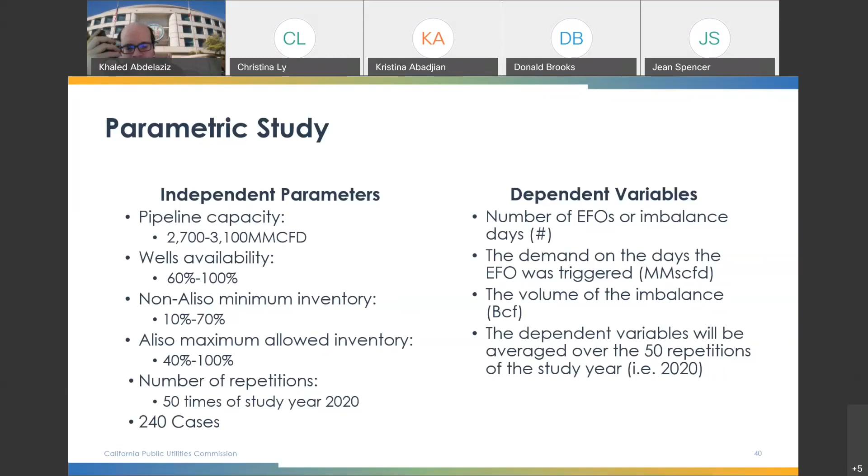And we're now on slide 41, but of course, due to visuals, I can't show all 240 cases, so I'm selecting here a subset of cases to show.

I'm going to show 4 pipeline capacities from 2.7 to 3, and Aliso Canyon max inventory levels varying between 40 and 100, so 4 levels. That gives me the 16 cases I'm about to show you.

I'm going for a cold year. I'm going to show you 80%, though I ran the 60% and 100% as well. I'm also going to make the call here and allow non-Aliso fields to be dropped to 30%, and show you the results for that.

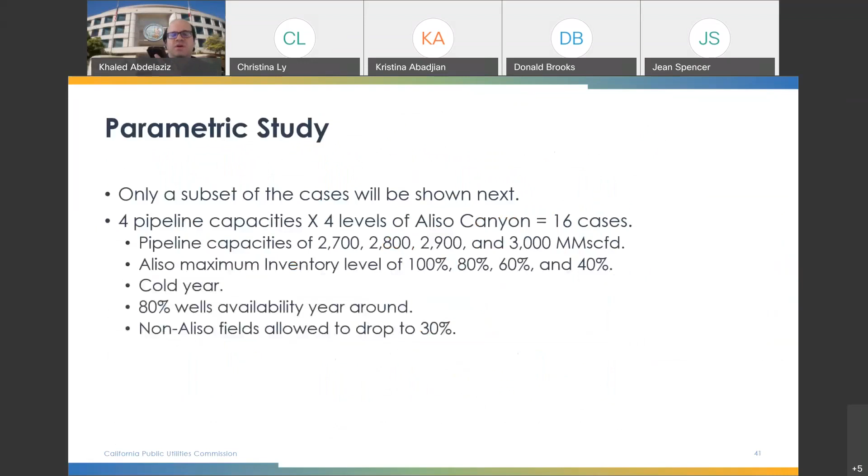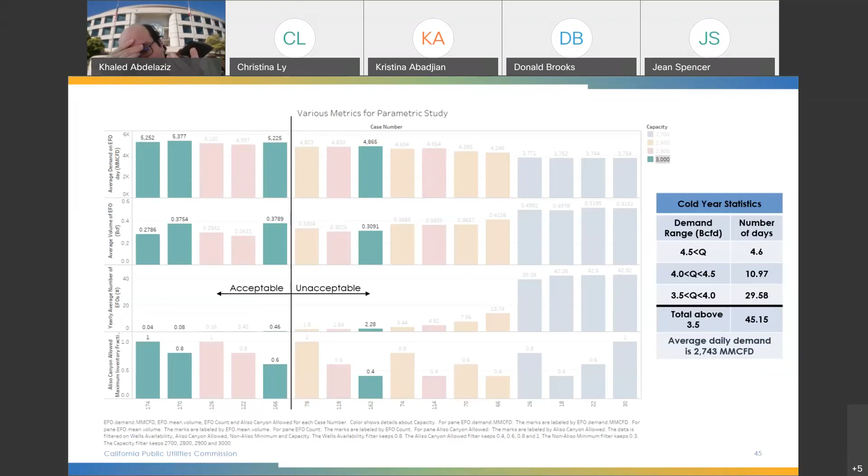So again, I'm showing only 16 cases here. Of course I ran the results for various other cases too — I looked at 80% wells, 60% well cases, and allowing non-Aliso fields to drop to 10%. I haven't seen much change, so for simplicity and for the audience, I'm only showing the results for these cases.

So, the summary of findings from the parametric study: the first three bullets are fixed for the table I'm about to show — 90% wells availability year-round, non-Aliso fields allowed to drop to 30%, and I'm still looking at a cold year. I'm summarizing the previous five slides I showed you.

At 2.7, we need at least 100% from Aliso. At 2.8, we still need 100% from Aliso. At 2.9, we need less of Aliso, so 80%. At 3 BCF per day, we need only 60% of Aliso. And I have 3.1 here struck out because that's not going to meet the minimum levels we obtained from Synergi modeling or the reliability assessment — not to mention that it assumes no planned outages on the system.

So again, based on your selection of the pipeline capacity, we have a recommendation for the maximum allowable percentage in Aliso, based on what you assume for the pipeline capacity. So the last slide here, it's a bit more dense too.

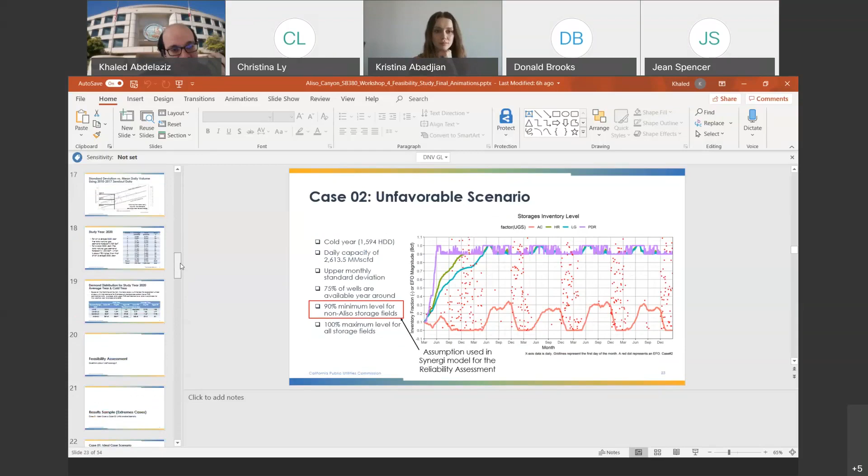So there is no way you're going to end up with more gas by the end of the year. You're going to end up with less gas in your inventory. So what this slide tells me is that Aliso is not helping at 2.7 and lower. It's already too bad on the pipeline.

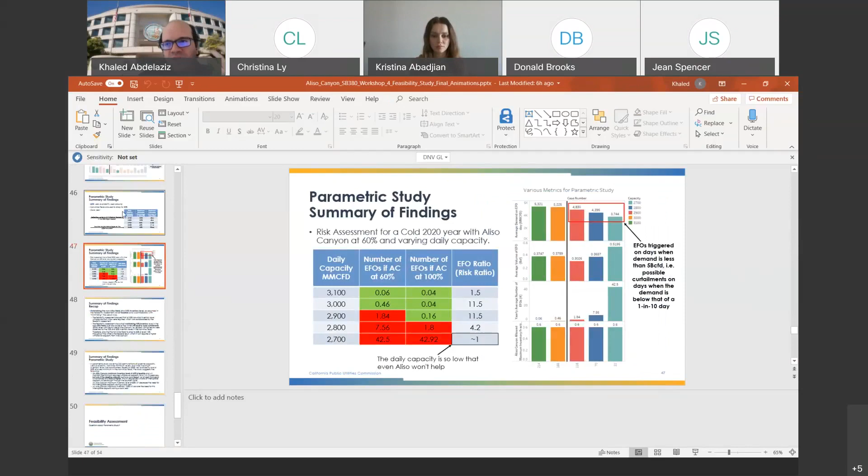Thank you. The next question is from Edward Bednars. You are unmuted. Well, I'm even more impressed, because I think your permutations of about 250 cases, by the time you put in your EFO thresholds, multiplied quite a bit. That was a useful way to filter out and try to illustrate what you were working with, especially now that I understand your 5,000 MMCFD supply trigger.

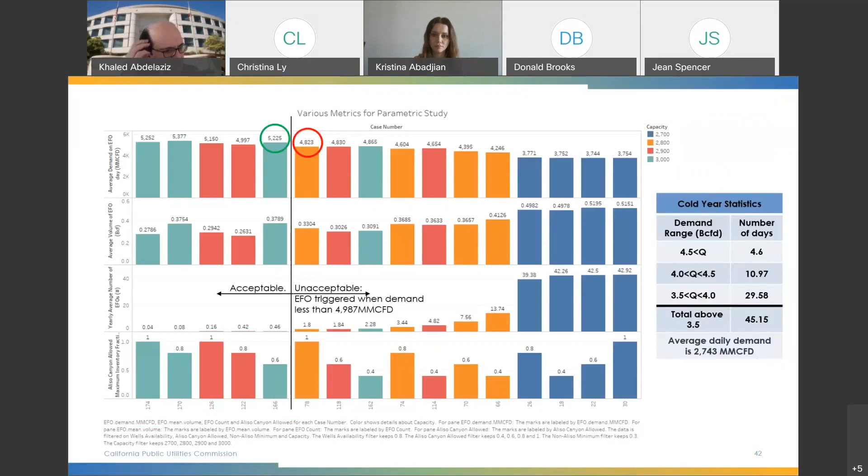To avoid the... Based on the assumptions that I'm showing, yes. Right. Okay, I'm not saying final conclusion with your assumption, we haven't looked at the practicality of the sequencing of the storage fields or anything else. I got you. Okay. And then, I certainly agree with the 3100 planned outages. That's not practical at all.

Then also, as far as your EFO criteria, I don't think that you really did come up with a hard criteria because you immediately on slide 47 did provide some data about how you could look at other thresholds if you wanted to. But I understand now 5,000 limits you to being able to do that.

Now, also, you made a comment that you were using an EFO to account for just about any shortage. Were you looking at other inabilities to reach supply, or was this you were trying to limit the cases you looked at? Can you rephrase the question? Was I trying to limit the EFOs?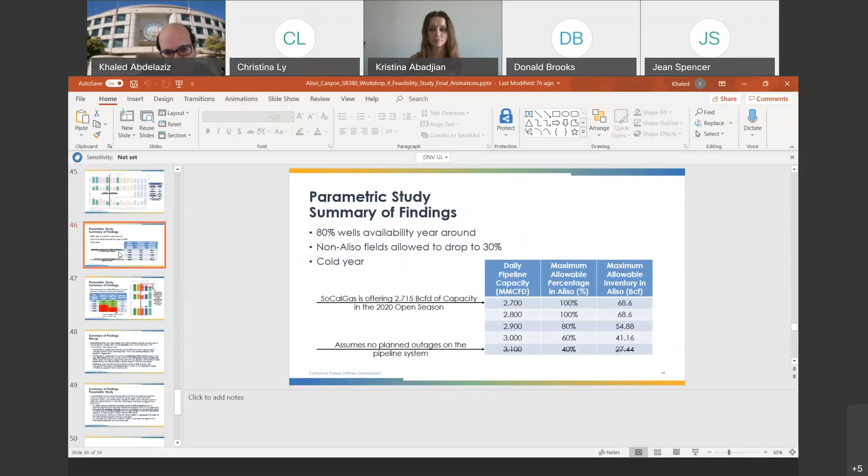Well, when I did the parametric study, I explained why I take those levels. So 2.7 was right below what SoCal offered in their open season. 3.1, what was used in the reliability. At this point, I still wasn't looking at even the open season. I didn't know what SoCal was offering. So I did those, but then if you compare that to what's being offered in the open season, you realize that if you want to maintain 3,000, you need to bring 285 on interruptible capacity.

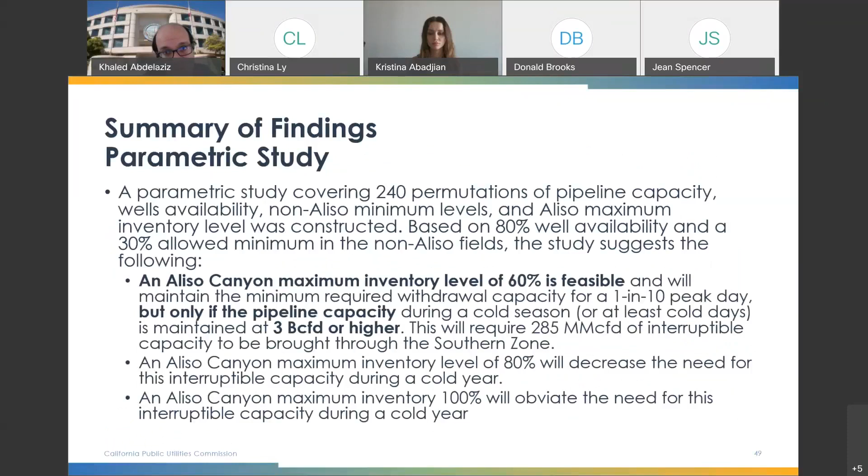I mean, I'm presenting the results here for stakeholders to weigh in and for the gas reliability. So again, this table here is the result of the modeling. If you assume this, then you pick that level for Aliso. And SoCal, in the open season, they say that the 2.7 is for a certain demand configuration, and if the demand is higher, they might be able to bring more, and that's why we have the other levels, the 2.8, 9, and the 3. I hope that answers your question, Norman. So I'm not assuming anything. I'm just comparing what I have here with what's in the open season.

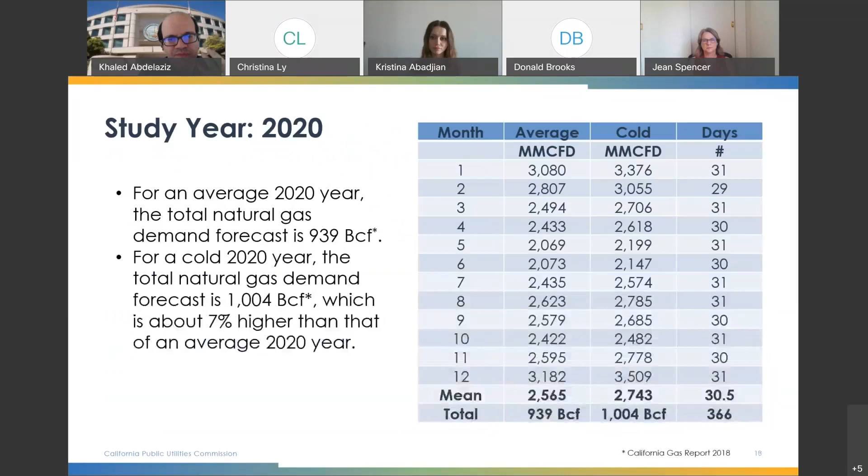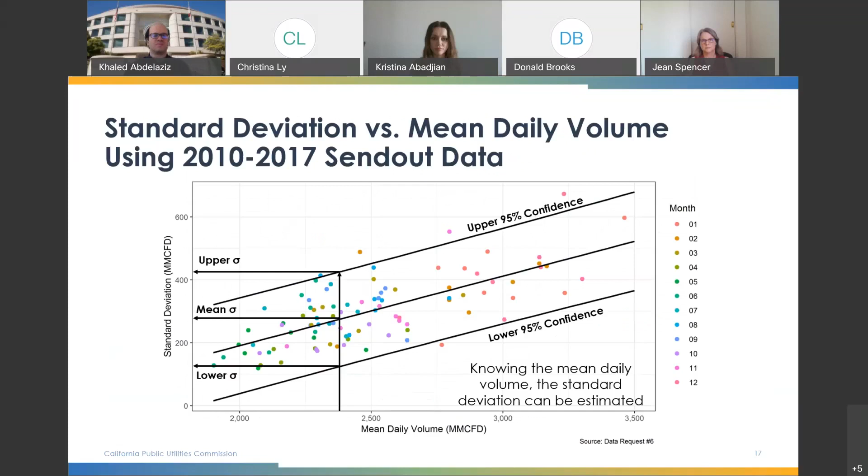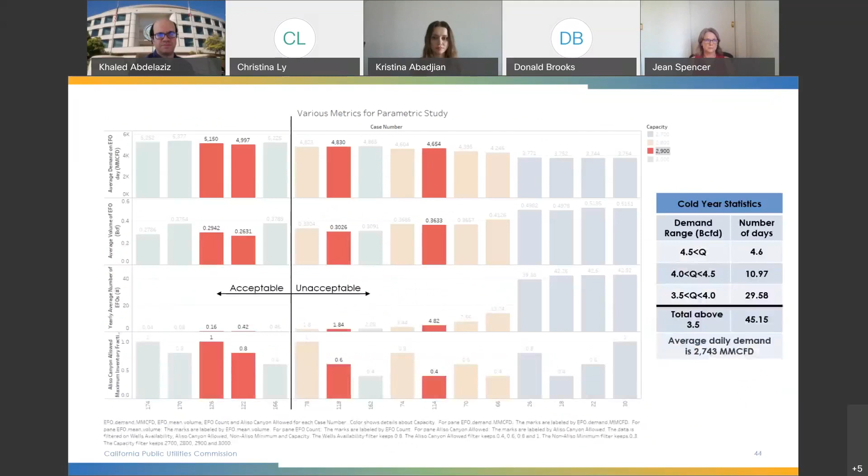All right, any more questions? I don't see any further questions. Actually, Mr. Peterson, did you have your hand up? Yes, I do. Yes. Go ahead. Okay. I just have a couple of others about some of the points of your presentation.

I just didn't quite follow, Khaled, because I'm not a statistician. First of all, neither am I. Why do you have to take the year 2020 and repeat it 50 times in the case 24, et cetera? And each time you repeat it, you're getting different results. You're getting different scatters of EFOs. It seems to me is it because you are somehow eroding the capability of the system each year?

So imagine you have for 1 month, you have a distribution, all right? And I'm selecting 30 numbers, which is the number of days in that month. Each time I select those 30, they are not going to be the same, because I'm drawing from a distribution that has many, many more points. So each time I drew those 30 days, it's different. And that's why I get these subtle differences from one repetition to the next.

And I think it perfectly mimics what happens in reality, because we can't tell for certainty what's going to happen in year 2020. And then to get something really statistically meaningful, you have to do that. Actually, I intended to do 100 years, but it would have taken a long time, so I'm doing 50. And then I have to average the data over those 50 repetitions. Does that handle a little bit your concern?

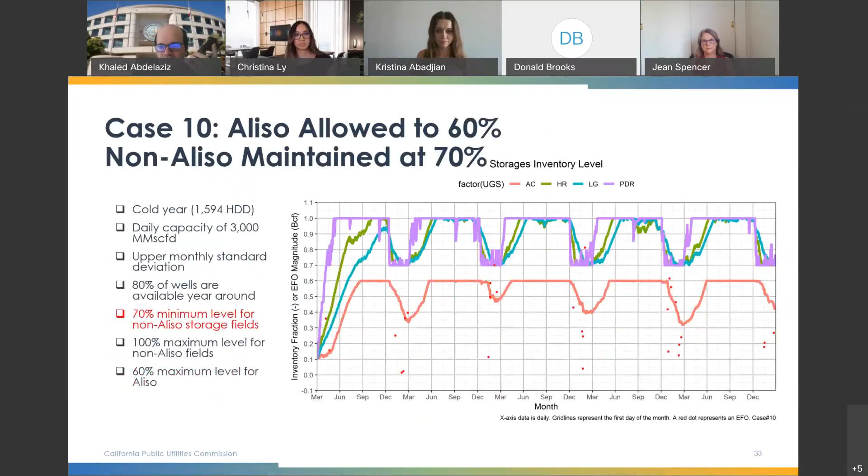Okay, thank you. That's very helpful. Thank you, Christina. Thank you, Norm. Thank you, and I think we can move on. I'll hand it over to Christina from the Gas Policy and Reliability team. So we're going to move into slide 51. Christina, all yours.

Thank you, Khaled. You can go ahead and go to slide 52. I'm Christina Ly, and I'm from the Gas Policy and Reliability team. We'll now be covering considerations to keep in mind when selecting a maximum inventory level. Energy Division staff recommends selecting a maximum inventory level.

I'm sorry, someone is not muted.

The Energy Division staff recommends selecting a maximum inventory level based on consideration of the following factors, in addition to party input and the proceeding record. First, consideration should be given to the risk assessment, which was just presented by Khaled. How much risk of some curtailment is acceptable to stakeholders and decision makers?

Next, consideration should be given to the unbundled storage program. According to the decision in SoCalGas's triennial cost allocation proceeding, also known as the TCAP, non-core customers do not have storage rights if there is less than 41.16 billion cubic feet of gas in Aliso Canyon. Now, if there's more than 41.16 BCF of inventory, then the additional inventory can go towards allowing non-core customers, which would include electric generators, to buy storage through the unbundled storage program.

Do you think we could return it to slideshow view so it's a little bit bigger? So I don't know if you're aware, Khaled, but we no longer see your screen. Does someone else want to share their screen and bring up the slides? I got disconnected, you want me to share the screen again? Can you guys hear me? Yes, please share the screen again. Okay, and which slide did we want to look at? I think it was the table of results. This one? All right, hold on, I'm sharing the screen. Screen 1. Can you guys see my screen? Slide 53. Yes, hello? Are there any additional questions, Christina? I don't see any additional questions.

Okay, Donald, why don't we start wrapping it up then, and we'll allow another opportunity for questions once you're done wrapping it up.

Okay, well I don't have a whole lot to say. Thank you all very much for your help and participation in today's webinar, and I hope we provided sufficient information or enough high-quality analysis to inform stakeholders as to the decisions and recommendations we're making going forward. This has been an incredibly long proceeding and a whole lot of work to get to this point, and I want to thank my staff and my team members and everybody around the Energy Division who put so much work into this.